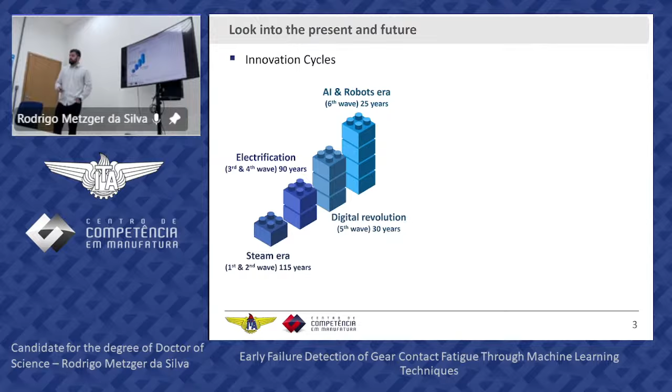For industry specifically, this is mainly driven by digital transformation, and with it we have a high demand for data. So how can we deal with this high demand of data in the AI and robotics era we are in right now? Since we are in this context, the gear market is no different. We have tendencies linked to monitoring equipment operation. Looking at gear market tendencies like high operational times, high rotational speeds, and increased reliability, they are all somehow linked to monitoring the operation of these devices.

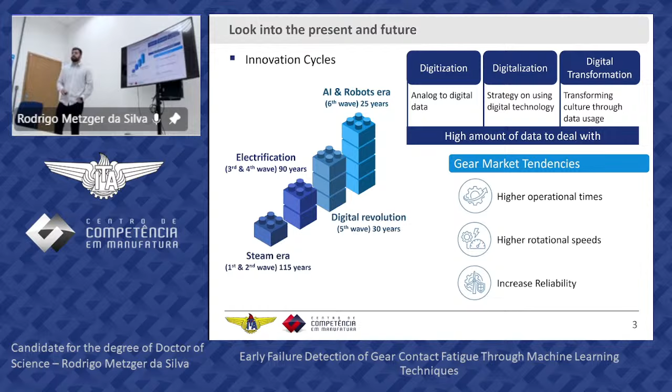But why are we talking about the gear market specifically? When we look at the costs of gear failure across different industries, it represents an important portion of equipment operation costs. For manufacturing machine downtime in the UK, up to 2017 there were up to 180 billion pounds a year in downtime costs. For the energy sector, wind turbines show 33% of equipment downtime related specifically to gear failure. And looking at gearboxes, 6% of gearbox faults are related to gear issues.

In this context, where gears are highly demanded and data is being generated, we look into the gear failure mode where identification is done by visual inspection - that's the case of gear contact fatigue. When we look at gear contact fatigue, we have characteristics of removal of material from the surface.

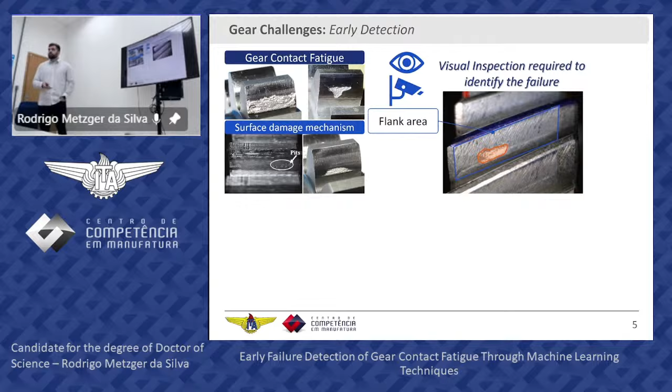So we have a surface damage mechanism that is occurring on the gear. But when we look to the standard that describes how to identify this failure, we are characterizing it as a damaged area, so we need a visual inspection. We use this standard as a reference to 4% of damage.

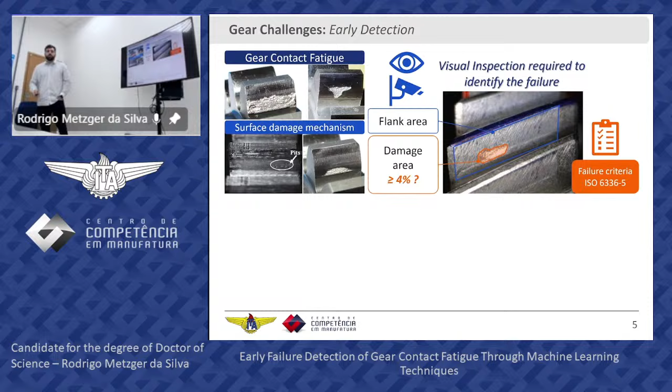Of course, we know that if we have some teeth damage on the gear mesh, this damage will provide vibration, will generate vibration during the mesh itself. However, when we look in the eyes of the standard itself, that we look for the 4% level of damage, we go through a few challenges on this early detection.

It should be easier to identify this failure through vibration when we are talking about high levels of damage. But when we look to the 4% itself, it's not going to be that easy. We have some overlap between the vibration generated by the failure itself and the vibration of the operation of the equipment. So this mixing challenge on identifying the failure is what has driven this research.

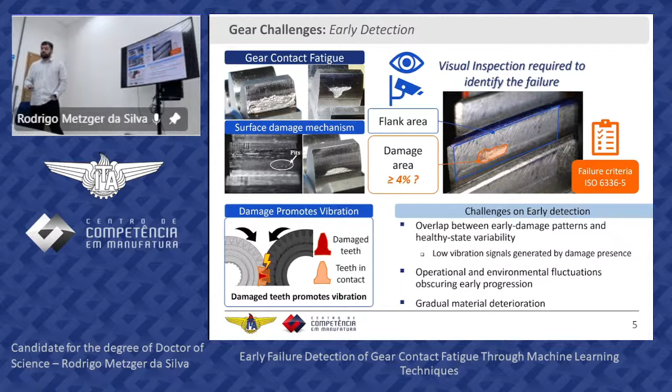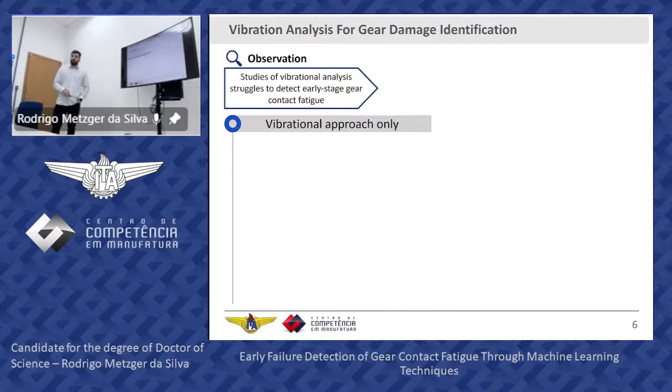When we look at this characteristic specifically in the literature, we see studies observe that vibration analysis struggles to detect early stage gear contact fatigue. Looking at what's causing that in the literature, we can see that we have a lack of studies in early stage. For different applications, we have slight pitting, and even then, for this particular study, we already have more than 4% of damage being applied in the gear.

We also can look at application of different features as inputs. So we don't have a consensus on which feature should be good for early failure detection, and on the other side, we have different applications of it.

We also have studies that do simulation, applying the induction of damage to identify the failure, where we have a simulation of damage that is way more advanced than that defined by the standard itself.

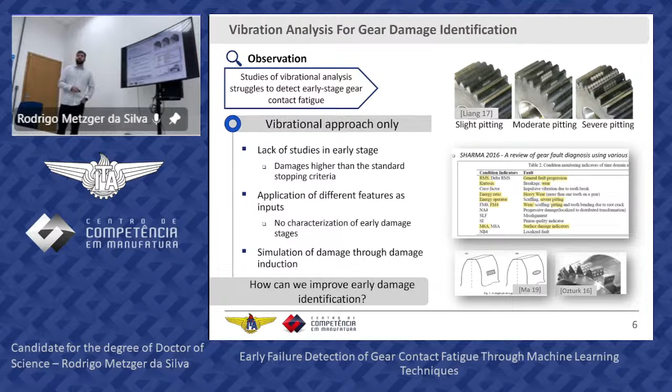So with that, we came with the question: how can we improve the early damage identification? When we look at the alternatives in the literature, we see that machine learning is an alternative, because machine learning models can be used to improve pattern recognition and data classification.

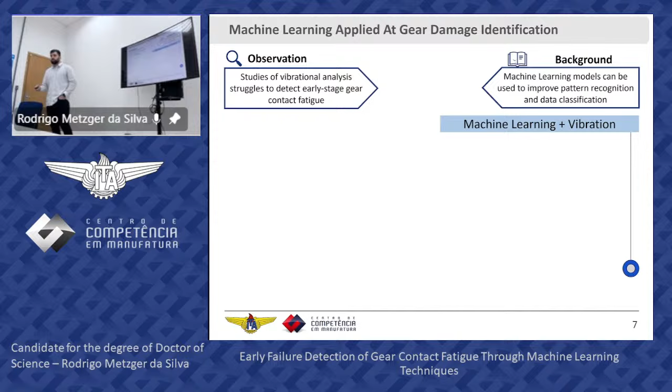When we look at the literature on machine learning in vibration to identify different types of failure, specifically for gears, we find a few challenges. First of all, we have different types of failure being applied, so we don't have a specific application of machine learning for gear contact fatigue, for instance, and for different levels of damage also.

We also have different frameworks being applied, so we don't have a consensus on which machine learning model should be applied or how the pre-process techniques should be for the application of machine learning. We also have some general models developing, so most of the studies are doing tryouts on different features to apply on the machine learning itself.

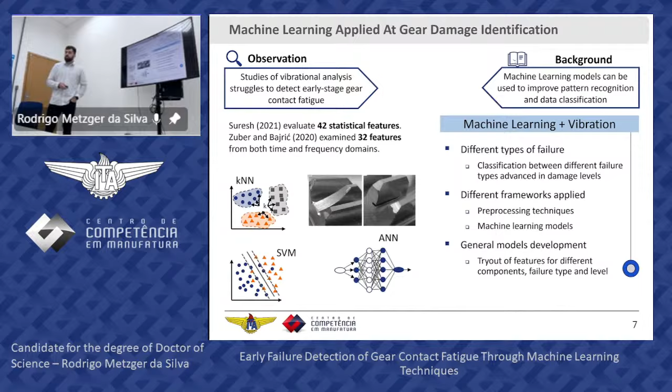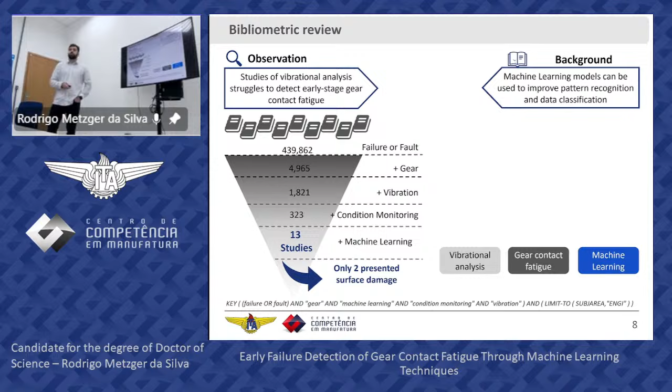This is one of the things that we find in the literature related to using machine learning with vibration to identify the failure. When we try to combine these three main topics - vibration analysis, gear contact fatigue itself, and machine learning - we come up with a bibliometric review of only 2 studies presenting surface damage. The main limitation we found from these studies is that, overall, we have a lack of studies in the early stage of gear contact fatigue.

We also have application of different features as input, so we don't have a consensus on that. And we also have machine learning being applied for different failure classifications, not for one specific failure or different levels of damage considering early stage specifically.

With that, we define for this research the hypothesis that machine learning models can identify the incipient stage of gear contact fatigue failure. This research is driven by the objective of identifying initial stages of gear contact fatigue failure through machine learning techniques in vibration analysis.

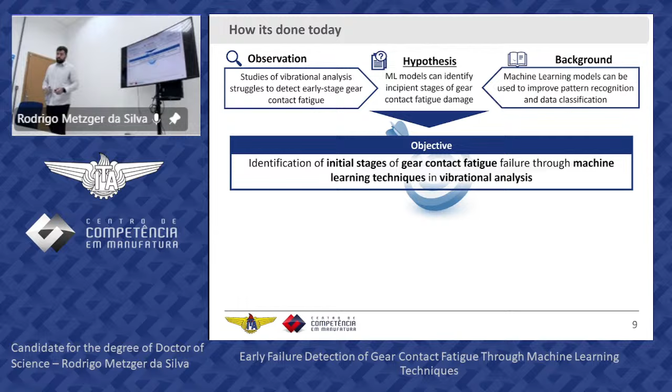To do so, we divide this approach into 3 research questions. The first one is more related to preprocessing and vibration analysis: how do different preprocess techniques and vibration features respond to evolutionary damage levels?

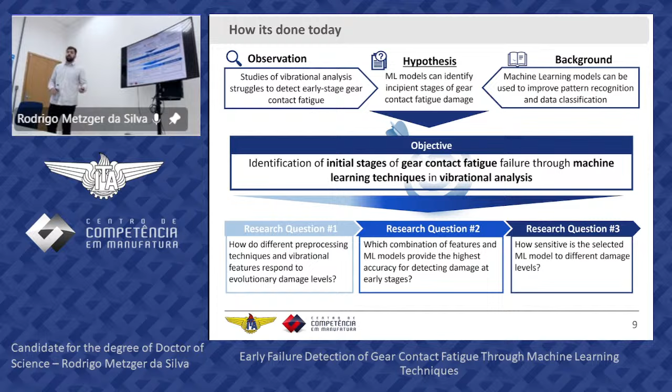The second one is more related to the development of the machine learning model for the early stage: which combination of features and machine learning models provide the highest accuracy for detecting damage at early stage? For the last one: how sensitive is the selected machine learning model to different damage levels? So we are evaluating the sensitivity of the model regarding different damage levels.

To start the materials and methods, we divide the approach by research question. The first one is related to preprocessing and vibration features. We need data to use for the analysis, so we generate data from different damage levels for this research question and evaluate preprocess techniques and vibration features.

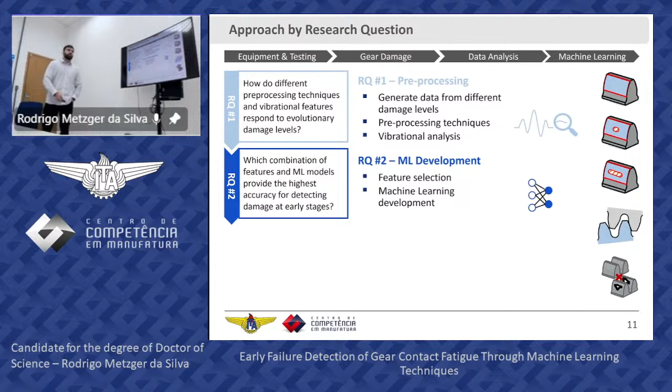For the second one, we develop the machine learning model using a feature selection technique, then do the training and testing of the model. For the third research question, we evaluate the sensitivity of the model regarding the damage levels we are applying. So we start with the equipment that we use.

A big thank you to Newcastle University as a partner, where we have this back-to-back test rig that we use, where we can control the 3 or 4 main operational parameters of the test: speed, torque, and temperature of oil and flow of oil during the test itself.

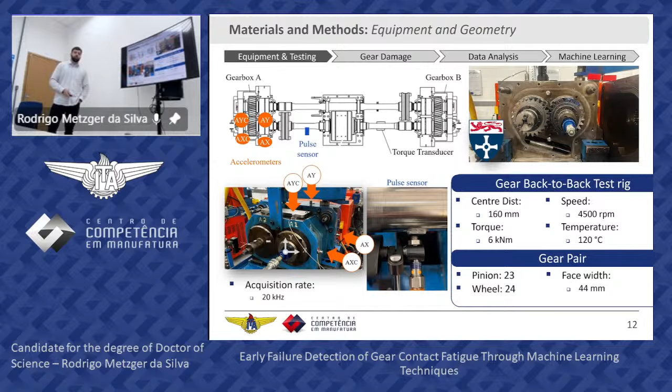We use a gear pair with a face width of 44 millimeters. Although the test rig was capable of controlling and monitoring all these parameters, we apply additional instrumentation on the test rig with 4 accelerometers and 1 pulse sensor.

The 4 accelerometers are applied in 2 main positions, one on the gearbox and the other on the gear cover. The pulse sensor is used so we can synchronize the rotation of the gear with the vibrational data itself. Using this equipment, we were able to perform 3 types of tests that we are presenting now.

The first one is the damaged versus undamaged test. We used a gear that was highly damaged so we could evaluate the difference between a highly damaged gear and an undamaged one, so we can test different preprocess techniques.

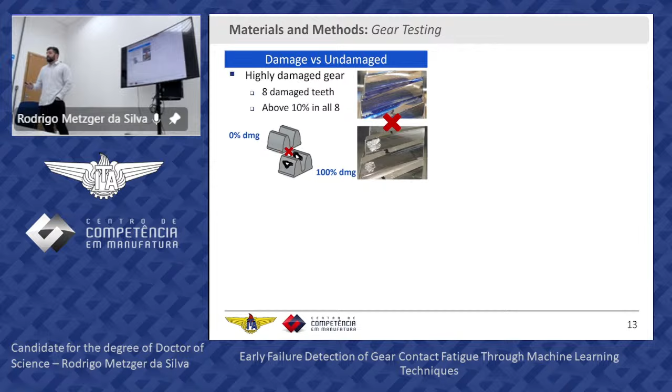We also apply natural damage testing, which is standard testing where we use the standard to perform the test and evaluate the generation of damage. Here, the damage is developed naturally.

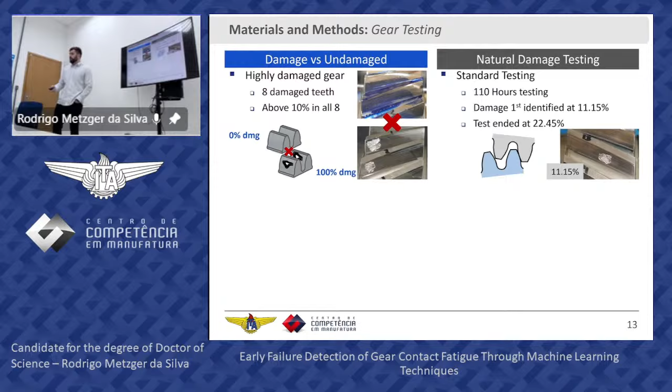For the last one, to ensure we have damage at an initial stage, we perform a test called induced damage testing, where we induce small early levels of damage on the gear itself so we can test it.

Going through each one, for the damaged versus undamaged test, we use an undamaged gear as a reference, which was a gear that didn't have any damage present on the surface, a new gear used in new testing efforts.

The other one used as highly damaged was a gear with 8 teeth presenting damage above at least 10% of area. So it's highly damaged, higher than the standard defined itself.

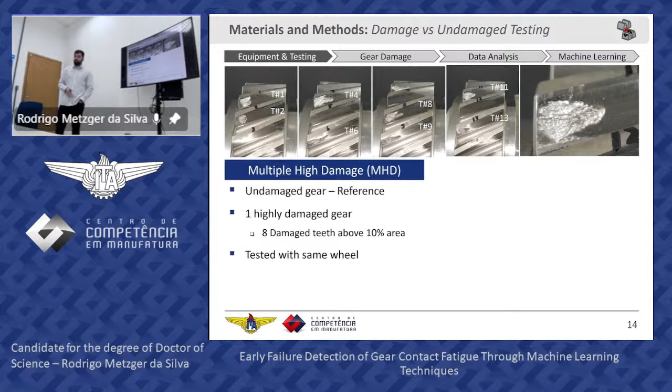We test this pair in both wheels, the same wheel for both tests. Regarding the operational parameters, we did two main parts during the testing procedure: a running-in part where we warm up the test rig.

And a testing part with higher torque where we were actually collecting the data to use for analysis later on. So this was the procedure of the damage versus undamaged test.

For the natural damage test, we use what is written in the standard itself, where we go through the setup of the test rig, the contact pattern test, and the running-in phase, which is also present here so we can smooth the surface of the gear.

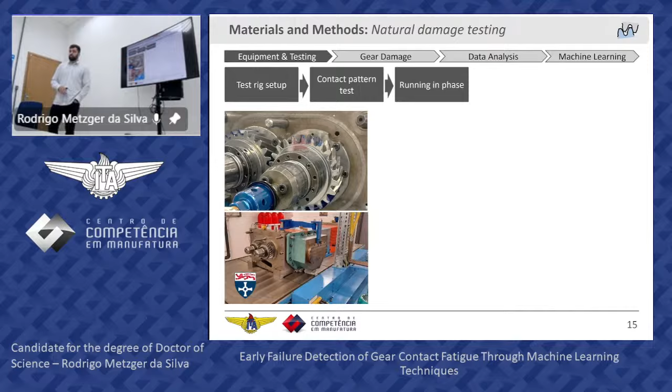Then we go through the durability procedure, which is defined as a cycle run, where we made periodic inspections on the gear to see if we have the damage, so we can assess the damage.

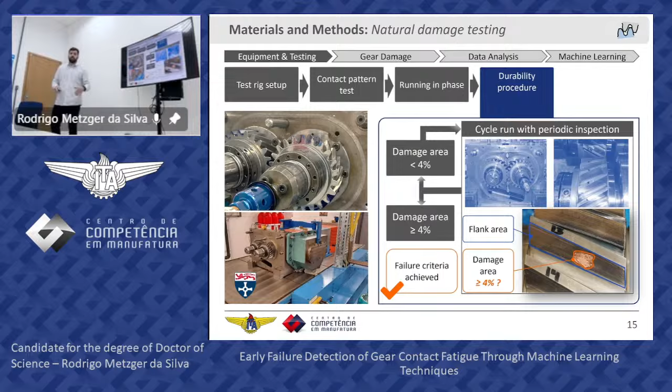At every inspection, if the damage is lower than 4%, we go to another cycle, and if we have it, we were able to stop the test because we already had achieved the failure criteria.

After that, we go through a failure analysis to evaluate if the damage presented was actually the damage we were expecting. As a result of this procedure, we had one test where the failure first appeared at 12 million cycles.

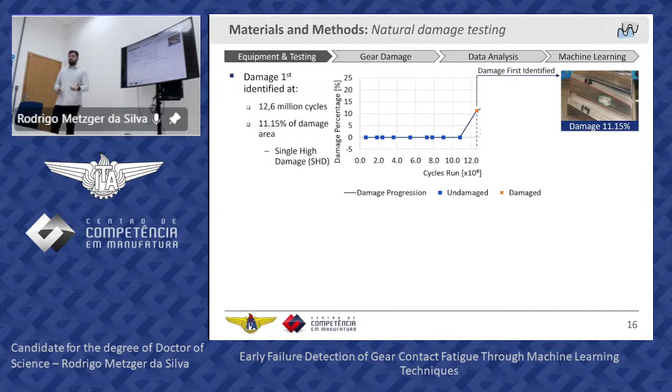So we did a great amount of inspections, respecting the minimum number of cycles that the standard requires. When we first looked into the gear with damage, it was already at 11.15% at the wheel of the gear pair. We were able to stop the test at that point, but we aimed to continue to evaluate the progression of the damage.

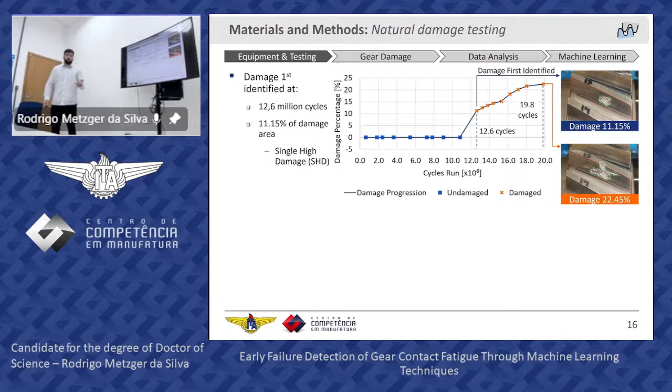We could see at 19.8 million cycles, that we achieved 22.45% of damage at the gear. So we can see the different inspections made. It's important to highlight that during this entire period, all the data was being saved continuously, so we have data from 0 to almost 20 million cycles.

At each inspection, we took photos of each gear tooth. And when we found failures, we also took replicas of the damage, so we could evaluate the volume of material that was removed during the test itself.

For the last test, the induced damage testing, we divided it into 2 steps. The first was a reference, because the idea was to make the damage progress evolutionarily, creating a progressive case on the same gear to try to simulate the gear operating in real life. So we first did a reference test where we applied the gear in the test rig, following the running-in procedure.

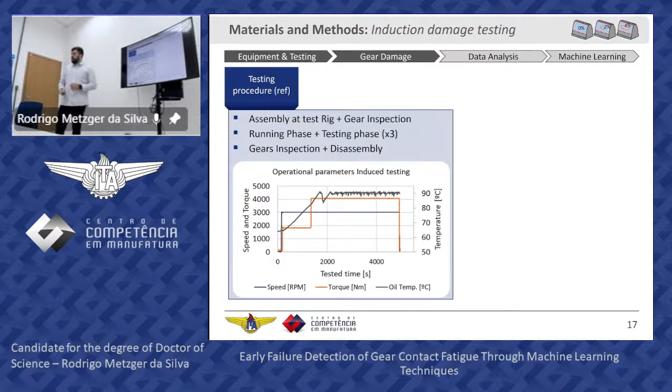The operational values of the procedure were the same as those we used in the other tests, so we could compare results. After the reference, we went through damage induction of 2%, then 4%, using the same testing procedure, where we took the gear off the test rig, put it on the CNC machine, and applied the damage. We used the CNC so we could have a repeatable way and a reference to apply the damage. We increased the damage first to 2%, then to 4%, tested it again, and measured the damage before and after.

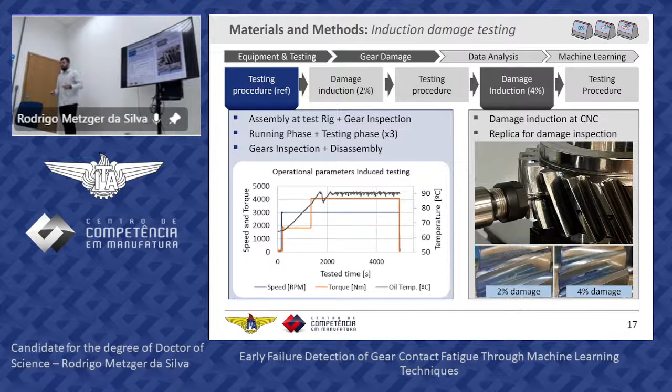To evaluate the damage itself, we used images. We took images of all the teeth and applied a MATLAB software to evaluate this relationship as a percentage of error regarding the flank contact and regarding the damage specifically.

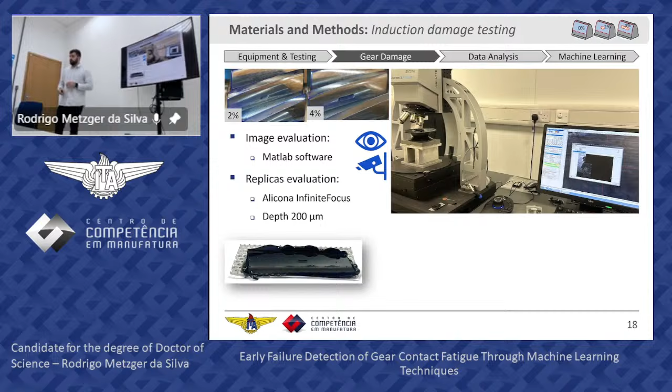For the replicas evaluation, we used an Alicona InfiniteFocus equipment, which allowed us to evaluate the depth applied, 200 microns, for the damage development. We achieved a result that agreed with the literature, as the difference on the depth before and after the damage was not much higher. So we could consider that the damage applied before and after the testing was still the same, meaning the damage did not progress further. This is how we evaluated the damage applied, and how we evaluated the other damage regarding area as well.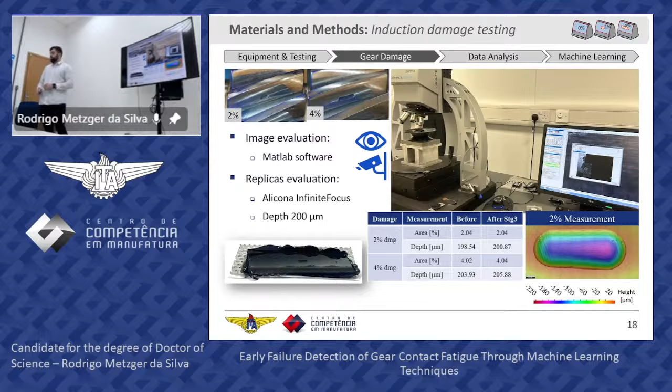For the data analysis, we tried 3 different preprocessing methods. The first is the raw data, which came directly from the accelerometers and the pulse sensor. With that, we were able to apply the TSA, the time synchronous average, where we averaged the data from the raw data using packets of 1 second, so we could make an average for each revolution of the gear.

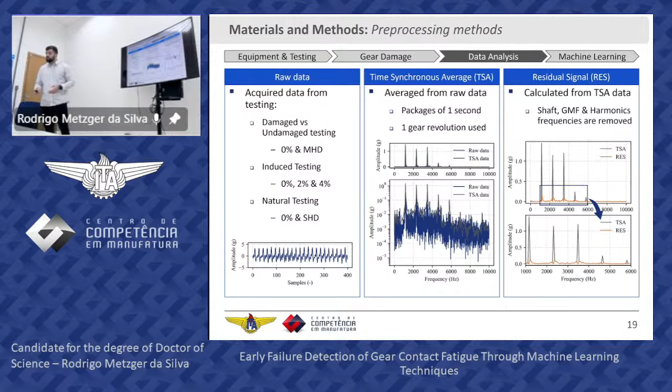In addition, we did a residual signal analysis, where we calculated the residual signal from the TSA, which is basically removing the periodic frequencies related to gear meshing, not the gear meshing itself, but other periodic frequencies present in the gearbox. So we remove the shaft frequency, the gear mesh frequency, and the harmonics of the gear mesh frequency, leaving only the residual signal, which should mainly reflect the damage in the analysis.

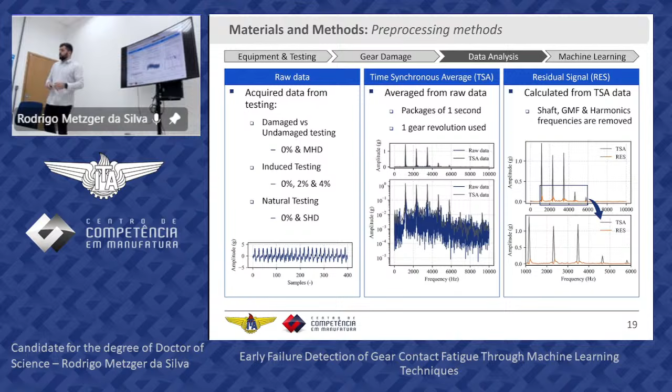With the preprocessing done, we also applied different vibration analysis features, so we could identify which one has a better relation to the failure specifically. From the literature we selected 6 of them that have some relation to material removal from the surface, and that is how we selected them.

And we also added a more recent study from 2019 that's more specific to pitting progression, which is one of the two we found in the literature before, so we could compare them.

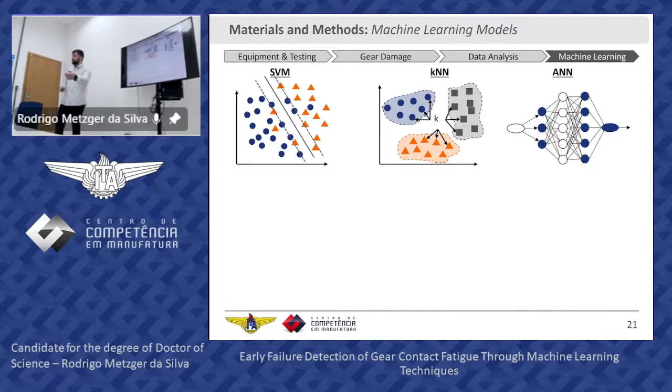On the machine learning side, we applied three different models, SVM, KNN, and ANN, to evaluate how they could identify the failure specifically. However, how should we tune each model since they have different hyperparameters that should be selected?

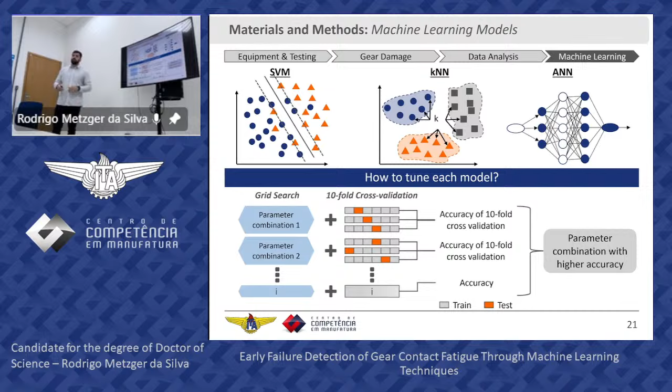For that, we applied the concept of grid search with cross-validation, where we select from a pool of parameters one parameter combination, divide the data between training and testing, then divide the training part into different folds and get data from there randomly. We use that to train an intermediate model to get the accuracy across the 10 folds. We do that for one parameter combination, then another, until we find the best accuracy result from this intermediate model, so we could select the best hyperparameters to apply afterward.

We also divided the data between training, test, and validation, so we could have data separated, avoiding overfitting specifically. For the induced model, we used the strategy of using one set for testing and the other two for training and validation.

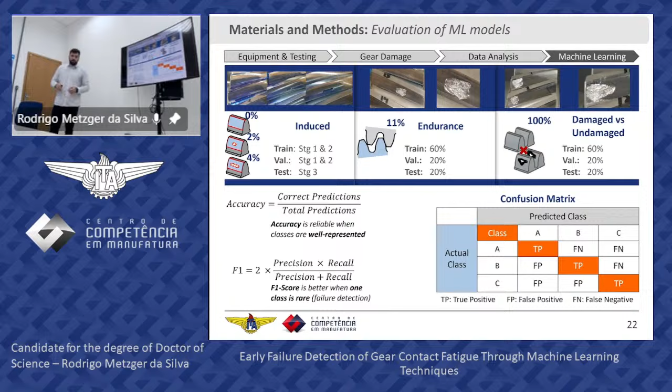As a way of evaluating the models, we applied accuracy and F1 score, which were more related to the machine learning model results, and all of that is calculated from the confusion matrix. We always expect the main diagonal to hold all the values, because that's where the actual classes are correctly predicted by the model.

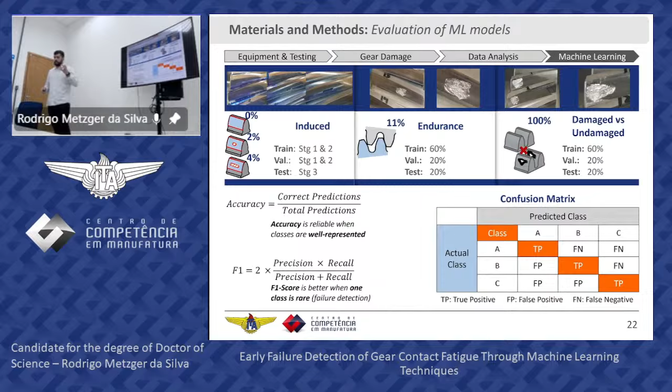We get the model specifically, but if some values fall outside the diagonal, we have false negatives and false positives, for instance, which could be related to the sensitivity of the model at that specific level of damage.

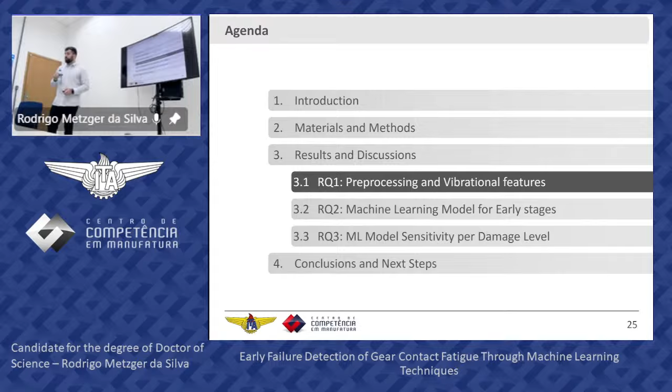By the end, we could evaluate all these machine learning models and this development approach by research questions. Now we're going to go through the results and discussions, starting with the first research question specifically for preprocessing techniques.

For the time domain, we started the preprocessing techniques looking into multiple high damage levels. We used a comparison with the gear that was fully damaged, considering it 100% damage. We then looked into the time domain with raw, TSA, and RES signals, and also looked into the frequency domain.

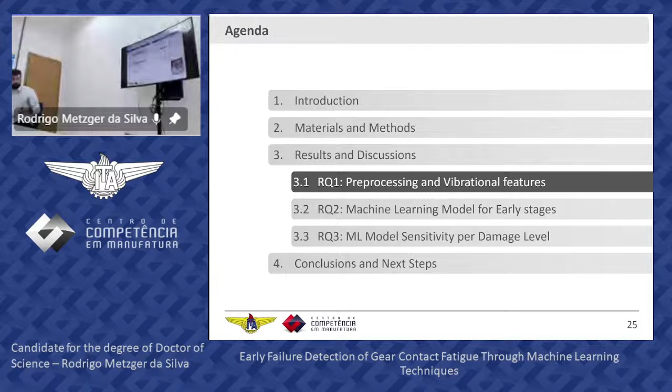So we're going to go through now the first research question, which is mainly regarding the preprocessing technique. We have a time domain analysis and a frequency domain analysis. The first thing we highlight is that the TSA preprocessing still represents the signal, because although we average over one revolution, we still have the representation of the gear meshing frequency, its first, second, third, and fourth harmonics, for instance, being presented here.

In the case of the RES, we have a reduction in the overall vibration, which we can identify, presenting here the comparison between preprocessing techniques for the same damage level. We still have some frequencies presented in the frequency domain, and different frequencies due to the damage presence. So even though we remove the gear mesh frequency, we have an increase in these additional frequencies related to the damage specifically.

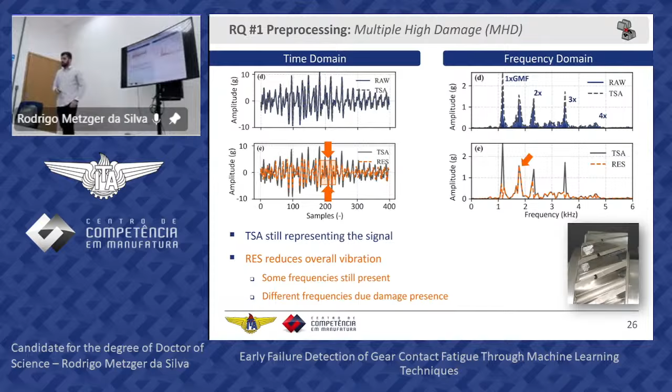When we compare the damaged versus undamaged tests, we can see a great reduction or difference in the overall vibration for the time domain of the RES specifically. When we compare the TSA, we can still see the gear meshing frequencies, which remain highlighted there with the damage present.

And when we look only at the residuals, which remove the periodic frequencies, we can see that the RES can still increase significantly with the fault presence.

So this we also have the presence of the sidebands, just by removing the periodic components itself. This highlights that the RES can represent the damage better than the TSA, because we are looking at data that's more pronounced, with higher amplitude than the others. And this also shows that the RES can reduce the signal.

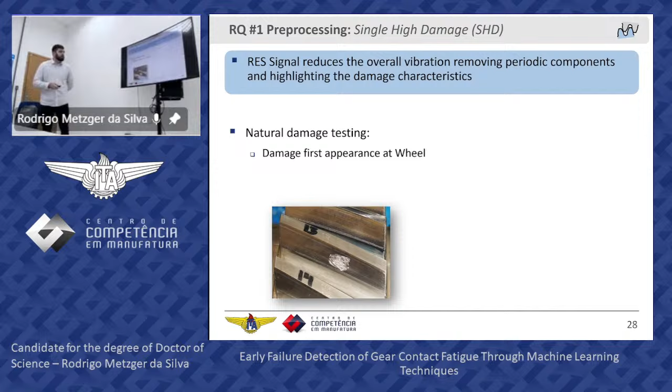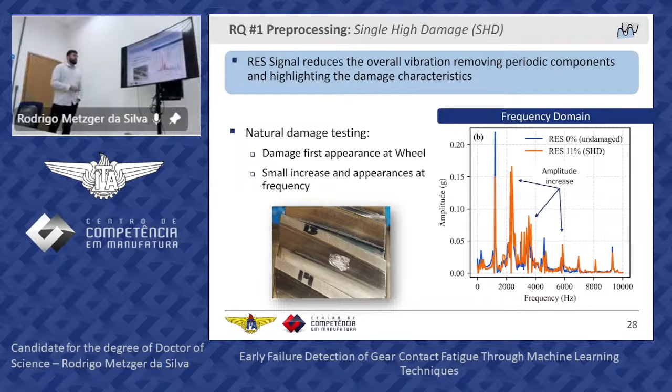This also happens when you look at the natural damage evolution. The damage first appears at the wheel during natural damage processing, and this challenges identification a little more, because we have a small increase in appearance at the frequency domain, since the damage appears on the wheel and not on the pinion itself. However, we can still see this frequency being amplified on the residual signal, it's just a small percentage, small amount, which is the same we see at the initial damage levels.

When comparing 0% damage in blue with 4% damage in orange, we can see a small difference in the signal, however it's not very clear to differentiate both of them. Since we know the difference between them, we can point it out, but it's not straightforward. Even when we look closer, we can see this difference and the small amplitude increase, but it's not straightforward to define. So even with RES, which gives us amplification of the signal and reduction of other noises, there's not a big difference perceived in the vibration signal.

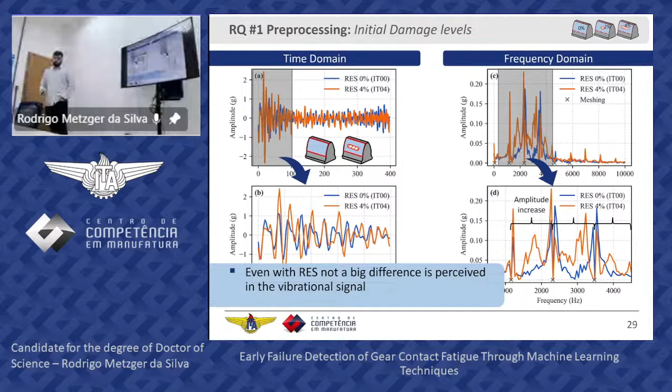This becomes a little bit clearer when we look at the preprocessing techniques, the vibrational features, where we do a preprocessing evaluation through feature extraction. We bring here two features as examples, the RMS and the energy ratio. We can see a small tendency increase with damage level for energy ratio, however for the RMS it is not. It is always very confusing between them and between the damage levels.

When we apply the RES, we can see that we have more of a standard pattern, kind of a tendency. However, it is not straightforward to differentiate, it's not easy to differentiate all of them because they're still a little bit mixed. So the RES preprocessing increases distinction in favor of some features, however it is not clearly separable, specifically if we go through statistics also.

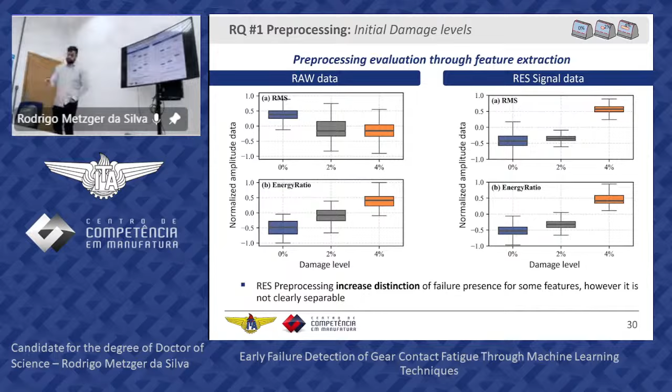So as a summary for the first research question, if we look at the multiple high damage test comparing damaged versus undamaged, we can see severe degradation visible in time and frequency domain. Only using raw would be sufficient to identify the failure because we have a highly damaged gear being tested. The TSA and RES can enhance clarity, but we already have very clean raw.

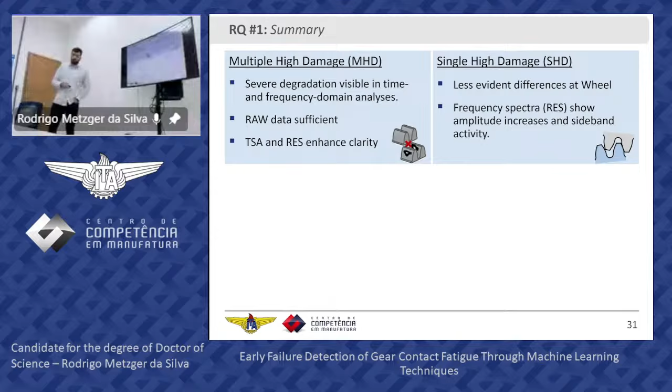When you look at the single high damage, it's less evident, mainly because the damage was present at the wheel. But we can still see some increase in amplitude, we can still see some frequencies present there. And for the induced damage, we can see a challenge differentiating 2% and 4%, which was actually expected because they are small levels of damage, so it's difficult to distinguish between them.

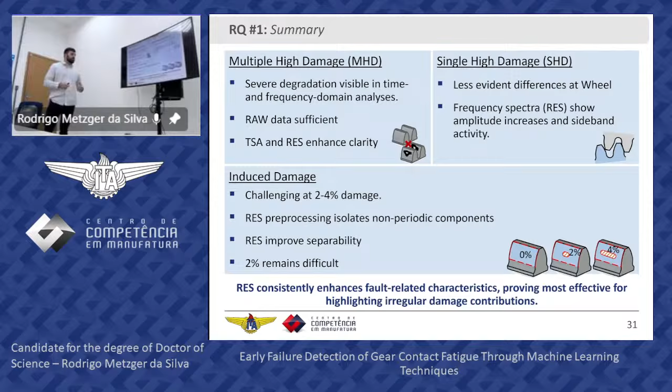However, the RES can isolate the non-periodic components and improve separability, though 2% remains difficult. So with that, we can conclude that the RES consistently enhances fault-related characteristics, proving most effective for highlighting irregular damage contributions.

And with that, in the evaluation of the features itself, we can then go to the machine learning development specific for early stage. We highlighted the difficulty that it's not straightforward to separate that, especially if you have a continuous test. We're not always going to have the data labeled from 0%, so we will not be able to classify them with only the overall value of the vibration.

So we bring here an alternative to look into the data, all the features, all 7 features that we selected, and look at them through a pair plot, and we can see a few things. We have here 7 features being evaluated. We can see that in some places, the 4% damage in orange is clustered, so it has a little more differentiation from the others.

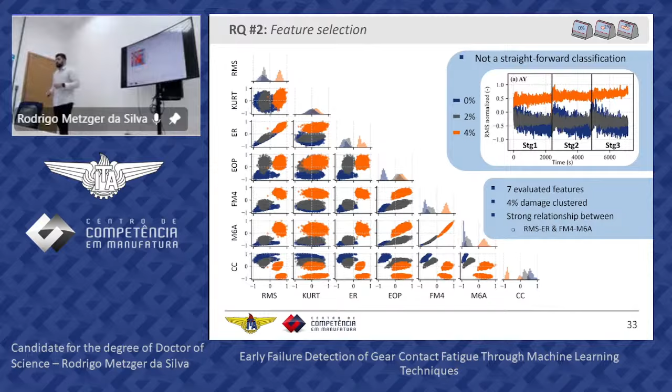We still can see some strong relationship between RMS and ER and FM4 and M6A, which was actually expected because they are very similar in the equation and how they are formulated. This makes more evidence when you look at the correlation matrix of the 7 features, where we have some strong correlations above 90%.

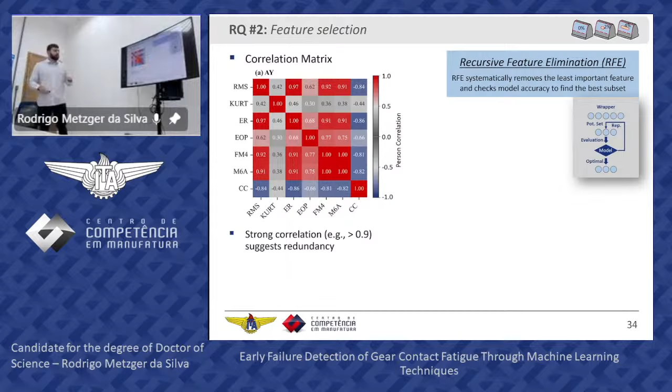To find a way to separate them, we applied a feature selection technique called recursive feature elimination, RFE, where we evaluate small potential sets of features. We evaluated RFE for only 1 feature, then blocks of 2, 3, 4 features, until we had all 7, ranking which ones are best for the specific application we are using. We can conclude that some features consistently rank higher, showing greater relevance, because we evaluated which ones are best across all of them.

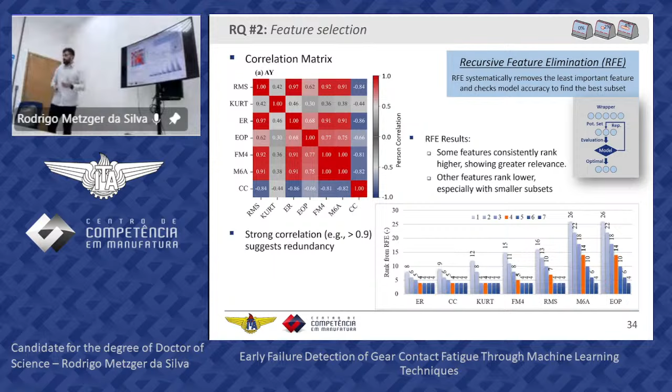With a lower value, we can see that from some points, some features start to get consistent in first place, and that's why we got to the number of 4. However, other features are always ranked lower considering all of this application, especially when we have smaller subsets. But when we use all of them, we can say this is equal. So with that, we came up with selecting 4 features.

It's good to correlate them regarding the application on the vibrational signal itself. So kurtosis has a characteristic of impulsive behavior detection. The energy rate and FM4 are more related to the energy-related measurements present in the vibrational signal from the damage specifically. And correlation coefficient has a signal similarity regarding comparison between undamaged and damaged itself.

Using these 4 features we selected, using all the methodology from the vibrational analysis, we developed 84 models for testing the machine learning model. We go through different combinations of sensors. Since we had 4 sensors, we could combine them, and we could also use data from only one of them to evaluate if it would be simpler or better. But we also combined all four as an alternative.

We used only one pre-processing method because we evaluated it as the best one from the first research question. For the set of inputs, although we selected four, we also included all seven so we could compare them and see if our selection was actually good, and how different the results were. For the other algorithm, we tested three that we had selected before.

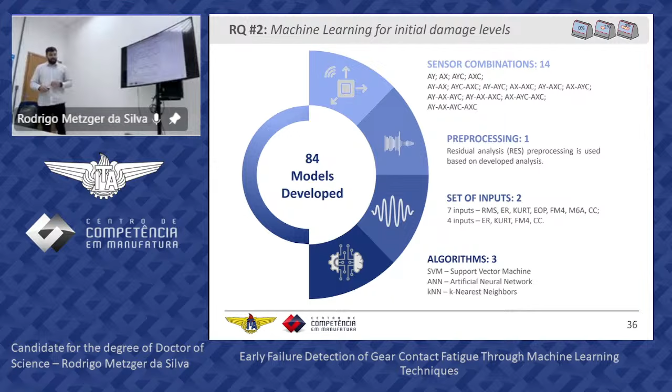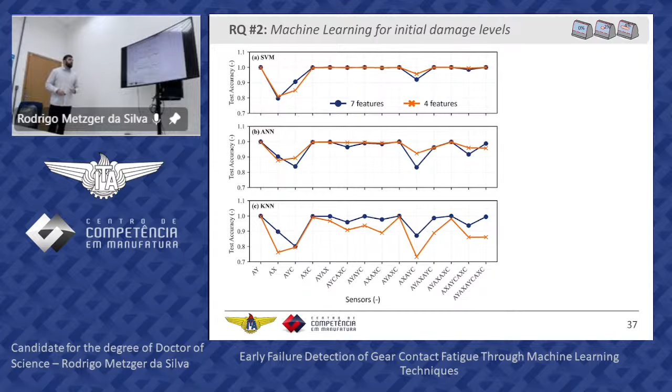Looking at the results of these 84 developed models, we have them here divided by machine learning model, so we can highlight a few things. The first is that sensor AY presented high accuracy alone for different models, which is actually a surprise and a good thing, since we are using only one sensor to identify the failure. We can see that for some reason AX alone decreased the accuracy of the models, which we'll discuss a little later. This characteristic happens for all three models we are using.

One common thing from the literature is using two sensors that we call here AY and AX, both in radial position. They present good accuracy, so what the literature says is more common is actually being represented well here.

We can also say that more features do not actually mean higher accuracy, because in some cases using more features was actually decreasing the model accuracy. When we compare the 4 features with the 7 features, we can see that the 4 features perform very similarly; they increased the performance of the model but did not decrease it by much. So it is comparable, since all the models' accuracy here was higher than 80%. We can say that the developed models were all able to identify the early stage damage with accuracy higher than 80%.

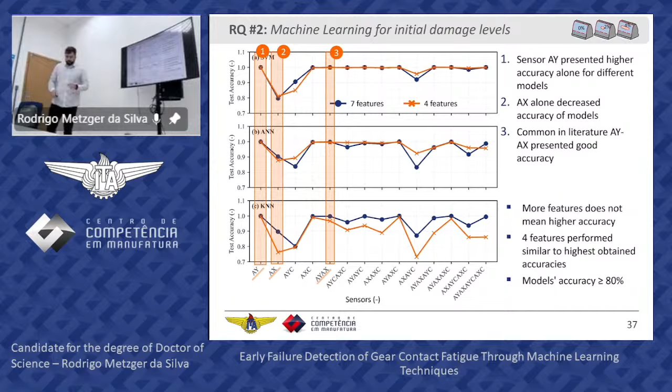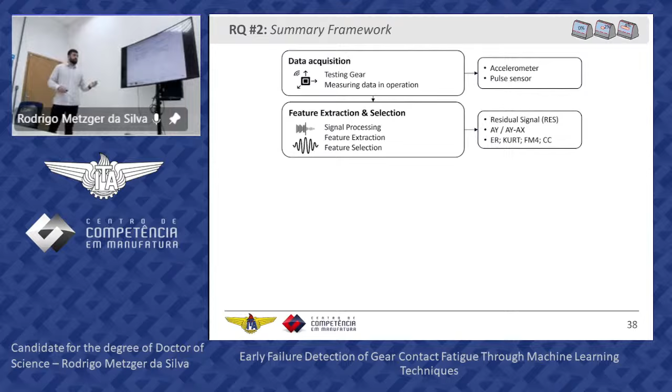When we move to model development, we see that SVM and ANN, combined with grid search and cross-validation, presented very high accuracy, so they were considered validated for the applications.

For machine learning diagnosis, we evaluated the different damage levels, and accuracy and F1 score showed that 0% and 4% results were very good. For 2%, it was a bit more challenging to separate it from 0% and 4% specifically.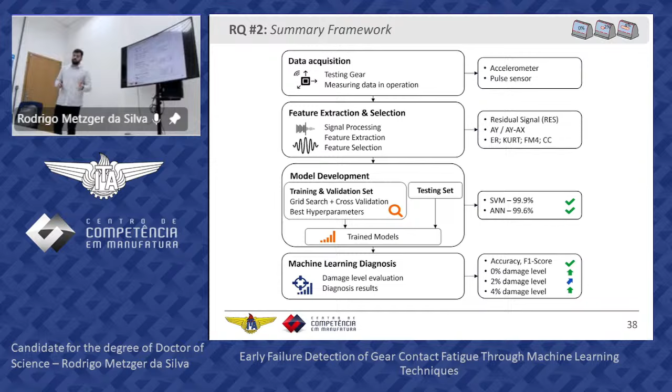This enables us to move to the third research question, regarding the sensitivity of the machine learning model with respect to damage level.

We're going to use the same data as before, but now, to evaluate the model, we are considering all five damage levels.

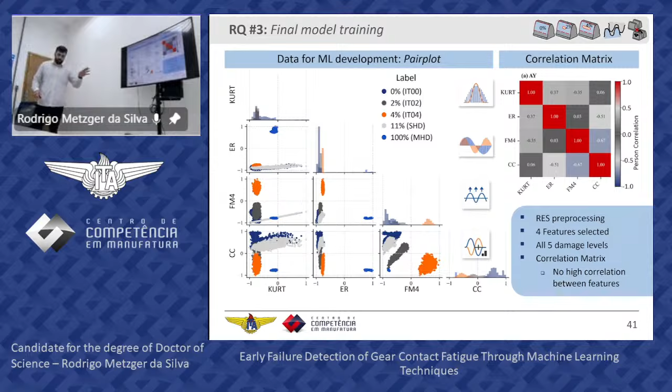So none of the features are redundant, which is what we expected when applying this approach. Now, developing the model using the framework we built before, for the five levels of damage, we arrived at the final evaluation of the model.

We have new models here, applying that framework with specific conditions for each of the sensors being used, and three models applied here.

We highlight mainly that we got accuracies above 60% for all of them. However, we have eight models with accuracy above 95%, which is a good thing, and the main point is that these are for specific conditions.

When we look at AY, sorry — this one consistently delivers the highest accuracy, while AX is still reducing performance.

We believe this is mainly because of the geometric characteristics of the gearbox, specifically that vertical sensors present better results than horizontal sensors, since AX is on the horizontal plane.

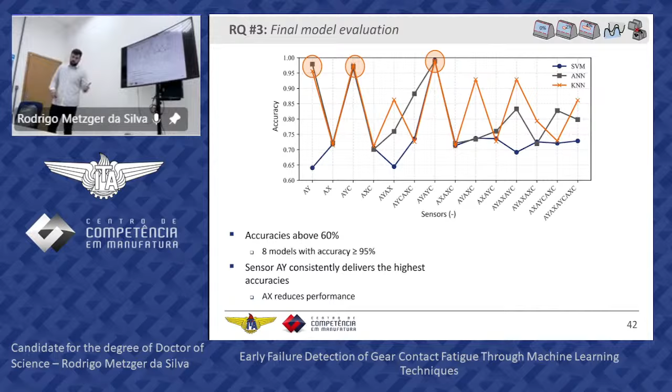Both sensors are radial to the gear; however, one is horizontal and the other vertical. As the best configuration, we selected AYAYC, a combination of the two sensors on the vertical positions, reaching almost 99%.

SVM, ANN, and KNN — all three presented 98 to 99% accuracy on the testing specifically.

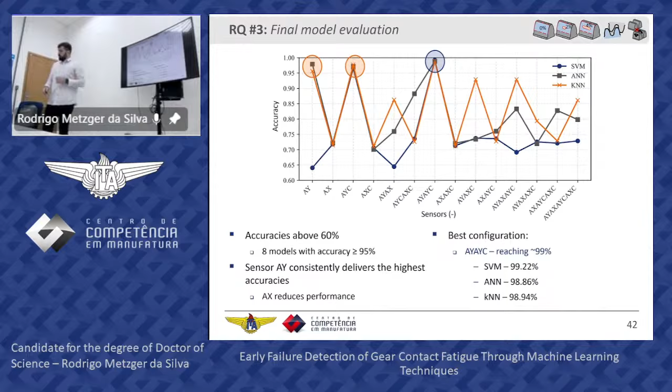Looking at the final model evaluation, considering the confusion matrix, we can see that for most of the damage levels the model presents good accuracy in identification, which was actually the goal here.

But looking at it more specifically, for some reasons we have a small misclassification occurring primarily between 0 and 11, which we can attribute to the weaker vibration response of the wheel.

Since the damage is presented on the wheel, and we were expecting the damage to present on the pinion, this is something that can happen in natural tests.

So it's getting a bit confused identifying the 11% on the wheel. A good thing, though, is that we have no confusion between 2% and 4%, which is a reliable identification of the 4% defined by the standard.

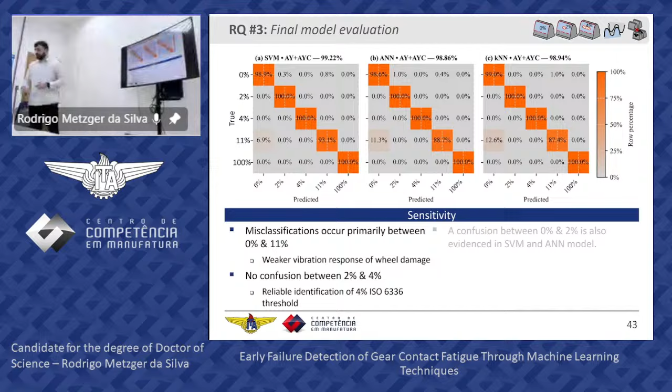This is a good thing for the models provided in this final evaluation. The confusion we got was between 0 and 2%, which is also evidenced in SVM and ANN.

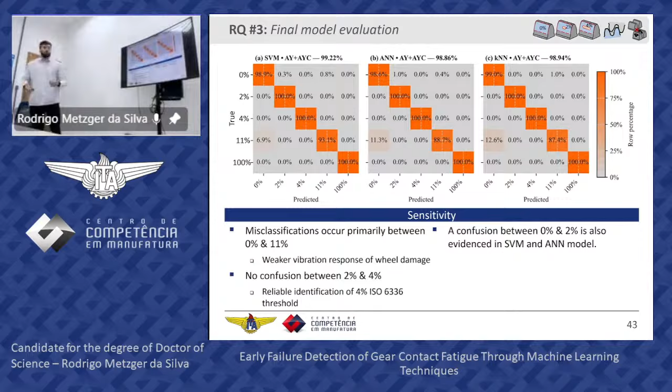As an alternative, let's look into the data we don't have labeled. We took data from the natural damage testing, where we have the period when the failure appears — meaning before this, we stopped the test rig, performed an inspection, and saw no damage.

After running it and stopping again, we saw damage of 11% on the wheel specifically.

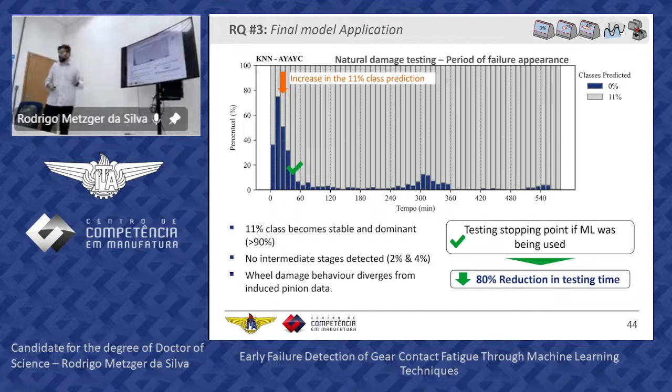So because we don't need to make periodic stops to check for failure, if we use this developed machine learning model, we can reduce up to 80% of the testing time, considering that we can run the test rig overnight. We don't have to stop for periodic checks or wait for the test rig to cool, for instance. This is a good result we can bring for the results of this research.

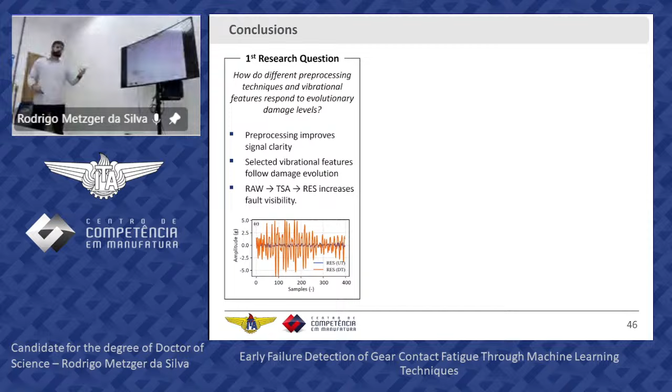So we can finish with the conclusion and next steps of this work, dividing them by research questions. The first is that the pre-process technique was actually improving signal clarity, so we were able to identify different damage levels. We highlight RES as the best one in our scope for fault visibility. For the second research question, the models were getting 80% accuracy for both, with some reaching up to 99%, which is a good thing.

By the end of the third research question, we can see that we were able to match the 4% damage identification and got good sensitivity for it. We were missing the 2% specifically. Damage at the wheel remains challenging because this is something that can happen - it's not actually expected, but it's something that can happen in tests.

And for the framework, we could have a reduction of 80% of testing time if you apply models instead of doing what is defined on standard as periodic inspection specifically.

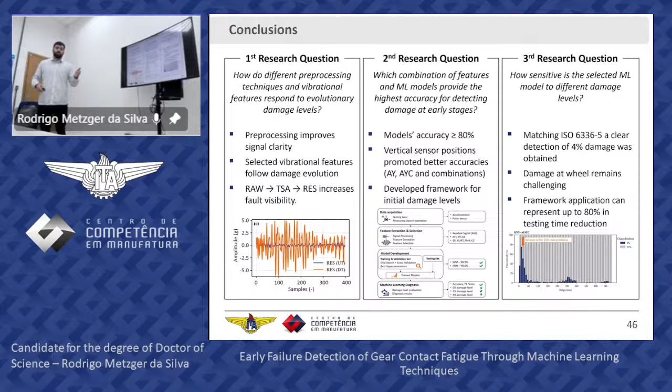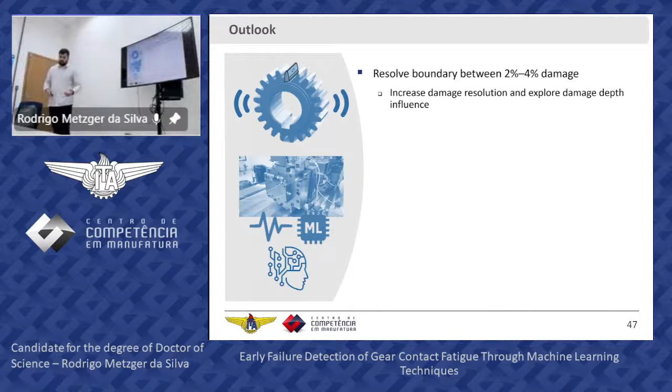So as an outlook for this work, we still need to resolve this boundary between 2 and 4% damage. Maybe increasing the resolution of damage detection in that area could improve classification. We also still need to improve detection of wheel side initiation - as I said, this is not something we'd expect, but it happens in natural tests. Additional tests for that would improve the dataset overall, getting more data to increase accuracy.

Another alternative to improve generality of the model is to validate it across other rigs and geometries, so we can apply the framework to other test rigs and geometries. By the end, we have additional testing of machine learning model families - this would be easier to do since we already have the data collected for this test, so we could improve generalization on that side.

So this is my presentation.